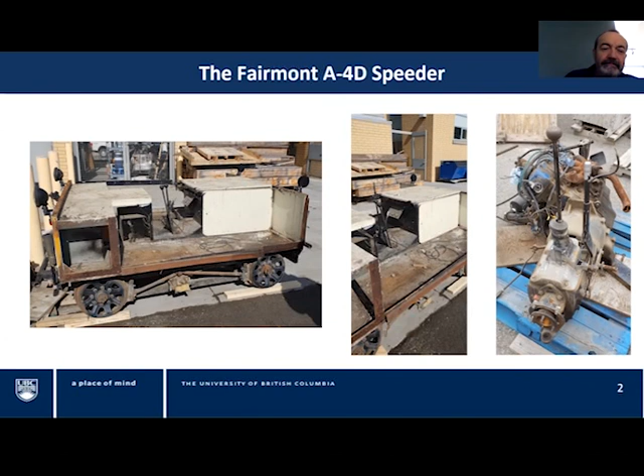It has a braking mechanism that is foot operated, completely mechanical, similar to a handbrake, which is applied equally to all the wheels using tread brakes. It had a manual transmission gearbox with a single reverse gear and 4 forward gears. When we received it, it was not in working order, although I'm told our lab technicians managed to get the engine to work. The idea is to convert it into a hydrogen-powered vehicle where we could demonstrate the Hydrail technology, and for the vehicle to be used as a test bed for future research.

The current powertrain is a series hybrid where we have a hydrogen fuel cell acting as a charger for our lithium iron phosphate battery bank. The batteries are tasked with meeting all the power dynamics, which is meant to improve performance and overall system efficiency. Power flow is unidirectional from the fuel cell to the battery bank, and bidirectional between the batteries and the motor, giving us regenerative braking ability.

By design, the entire system voltage doesn't exceed 60 volts, making it a low voltage design according to CSA for safety. Low voltage means high current, which is not recommended for production as it is more costly. However, it simplifies our design and avoids us the need for specialized high voltage equipment, training, and safety certifications.

So a little bit on what we plan to do with this vehicle. The retrofitted vehicle mass remains unchanged at 1,000 kilograms. We replaced the 60 horsepower engine with a 20 horsepower, or 16 kilowatt, electric motor.

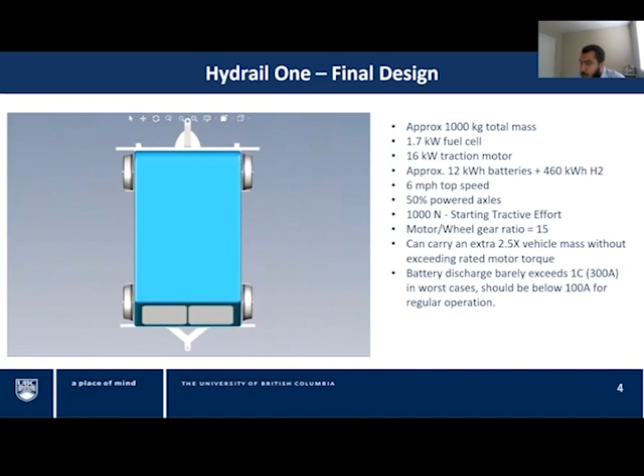The energy storage consists of 12 battery cells, each at 1 kilowatt hour, plus 2 ultra-high purity, high-pressure steel hydrogen tanks at 183 bar pressure, each carrying approximately 7 kilograms of hydrogen, for a total onboard hydrogen of 14 kilograms.

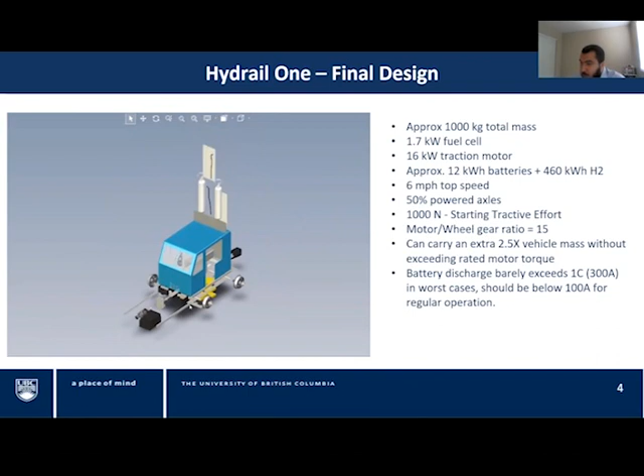At rated power, we should get 45 minutes of operation. However, we expect power demand on tangent level track and at speeds below 10 miles an hour to be a quarter of that of rated power, for example, 3 to 4 kilowatts. This gives us approximately 7 hours of continuous operation.

And if we assume a 40% fuel system efficiency, the stored hydrogen should require refilling once every 100 hours of operation. The drivetrain was designed to focus on torque production as opposed to high speed.

The vehicle should produce 1,000 newtons of starting tractive effort, meaning that for every kilogram of mass, the vehicle produces 1 newton of starting tractive effort. For comparison, a GP9 locomotive produces approximately 2.5 newtons per kilogram, and that is a locomotive meant to pull many heavy freight rail cars behind it.

Continuous tractive effort is achieved through a combination of a unique electric motor technology and speed reduction of a 15-to-1 ratio. So we are using speed reduction, or torque multiplication. We're really multiplying the torque.

Theoretically, the vehicle should be able to pull 2.5 times its mass without exceeding the rated torque for the motor. And even in the most extreme cases, the batteries don't exceed their 1C discharge rate, and should normally be at less than 0.3C most of the time.

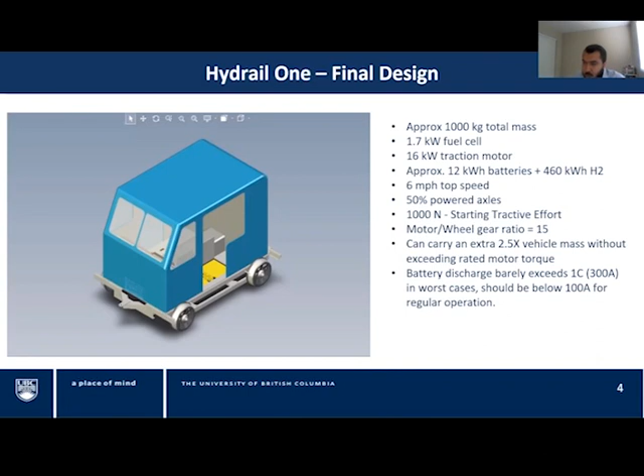So what have we done so far? Well, in March 2019, Caribou Rail delivered the speeder. Removal of the existing powertrain and other systems such as the heater, handbrake, wheels, and fuel tank was completed in May. By August 2019, we had disassembled the chassis.

Parallel with the disassembly effort, we were constantly taking measurements and updating our CAD drawing of the chassis. In September, we had a good estimate for the final vehicle mass, which we used to size the drivetrain components to ensure adequate torque production. We also spec'd the drivetrain parts such as the motor and speed reducer.

By October, our traction motor had been delivered, and our pneumatic tread brake system was designed and ready for building. We ended up ditching tread brakes for disc brakes, and our motor/speed reducer combination block was fabricated. The battery cells, as well as the battery management system, were delivered in January 2020 and were subsequently tested.

By February, we had received our Ballard fuel cell, which we have so far not tested, mainly due to regulations on in-lab hydrogen storage and then the pandemic. As of May 2020, the drivetrain and chassis are at 100%, having been assembled, tested, sandblasted, and painted.

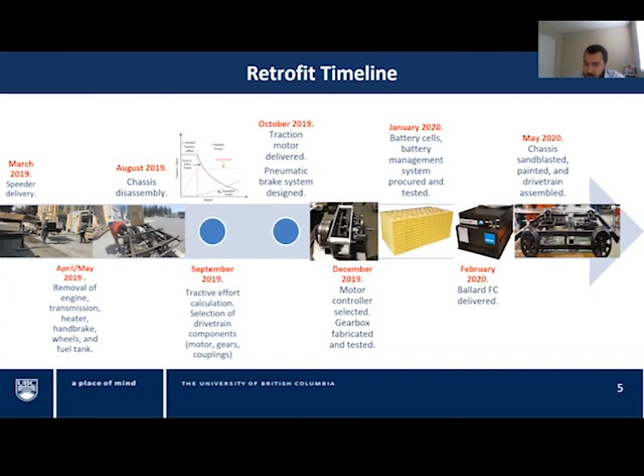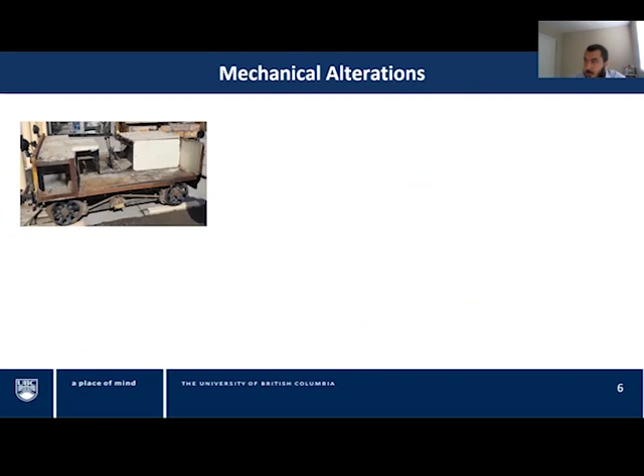So here's a slide showing the main mechanical alterations. This is the vehicle as we have received it. This is the vehicle after we removed the engine and the transmission block. We did some more removing — the entire vehicle body, the fuel tank, batteries, the heater, everything. And now we have the chassis.

We ended up removing some more just to clean it up and draw the parts. Then we assembled the drivetrain to the rear axle. And then at last we have the vehicle sandblasted with the drivetrain assembled and the entire chassis painted.

Here is a short video of progress as of June 2020. So this is from a week ago.

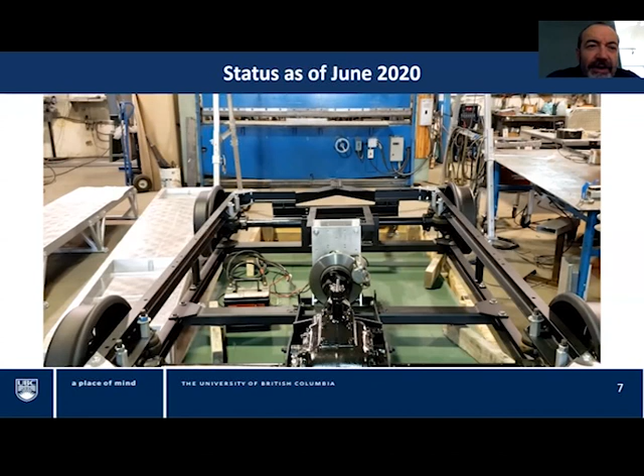Cassidy, are you on mute? Yeah, I'm here.

There we go. All right, key design factors. When deciding upon the layout for Hydrail 1, the following objectives were kept in mind: safety, ease of use and maintenance, and simplicity of our design.

Safety is obviously a priority, and therefore all design choices were made so that safety was not compromised in any way.

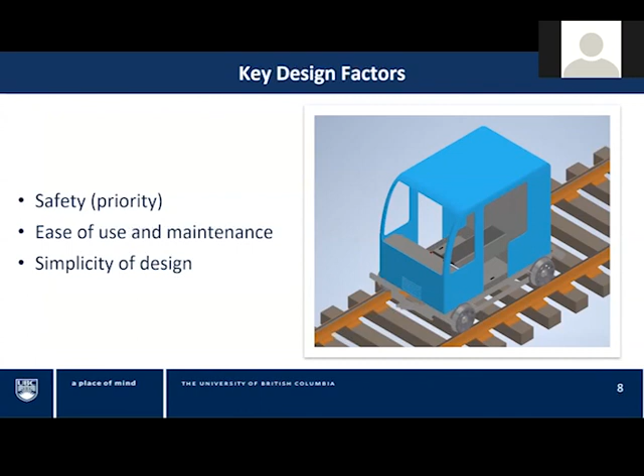The greatest danger in a vehicle that runs on hydrogen gas is obviously that the gas may combust, and so our vehicle will have exceptional ventilation to prevent the buildup of hydrogen gas in case of leaks.

This is why the gas lines, hydrogen cylinders, and fuel cell exhaust are all sealed off from the interior of the vehicle inside the gearbox cover, which is a T-shaped compartment that can't be seen in this picture, but will be seen in later pictures.

The large opening in the vehicle floor allows for airflow. Realistically, this will probably be covered by a grate vent to prevent large debris and animals from getting inside the vehicle.

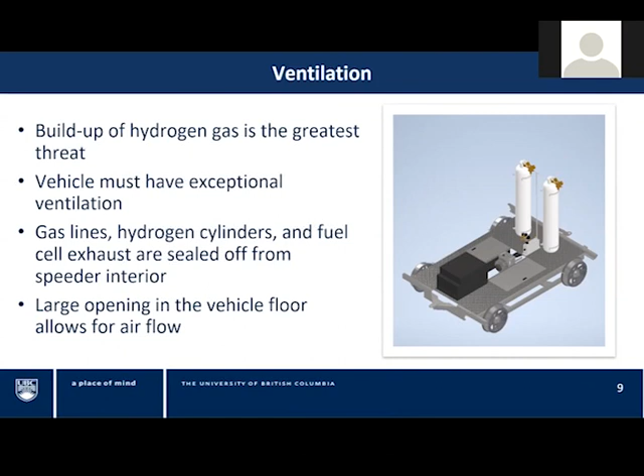The hydrogen fuel cell is the heart of Hydrail 1, providing, in addition to the battery banks, the power for operation of the entire vehicle. The fuel cell is air-cooled and therefore requires an air intake, and also produces exhaust that needs to be vented to the vehicle's exterior. For this reason, we have placed the fuel cell at the very front of the vehicle, where the internal combustion engine of a car, for example, would normally be placed.

The grill and air filter in front of the fuel cell's air intake will catch any debris, and the rear of the fuel cell is open to the exterior via the opening in the vehicle's floor. One possible improvement over the current setup would be to add a system that would catch the pure water exhaust while still allowing the air to be vented to the vehicle's exterior.

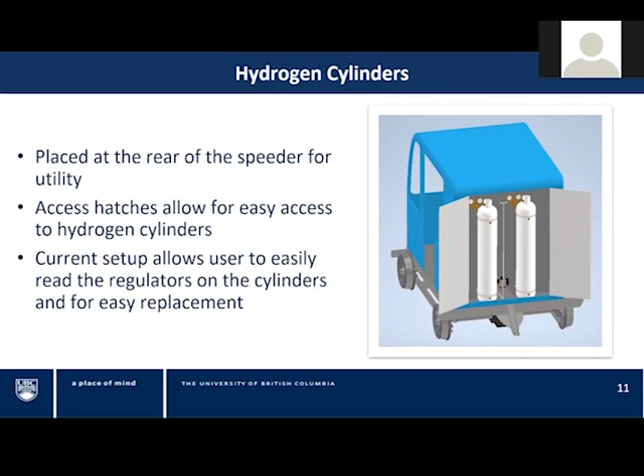The batteries that help power Hydrail 1 are all housed in two bays located beneath the vehicle floor and accessible through hatches, one on each side. The benefit of locating them here is that it takes advantage of unutilized space and lowers the vehicle's center of gravity. The power cables from the batteries will run under the floor and up into the center of the gearbox cover to the fuel cell and dashboard.

The data cables running from the fuel cell to the valve block will run through the gearbox cover, and the gas connections from the valve block will run up to the hydrogen cylinders. Next.

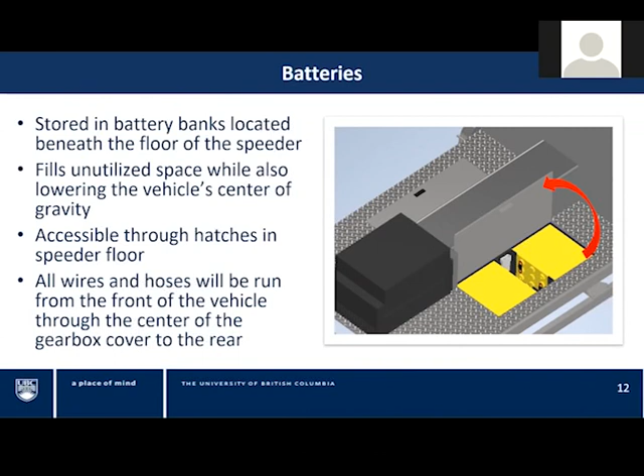All right, that's it. Thank you very much.

All right, thanks, guys. That's great. Can we leave questions to the end of the session, or does anybody have a burning question right now? All right, hearing none, I gave you a split second there. Grace Kwan, you're on. Grace, are you there? Unmute yourself if you are.

Hi, Gord. Thank you for inviting me to this very interesting program. I'm just going to share my screen now and go through our presentation.

Okay, so Hydrogen in Motion. Higazi showed a very interesting presentation about what you're doing using standard high pressure tanks. What we would like to use is our innovative solid state hydrogen storage. To give a summary of what's happening in the hydrogen landscape: our executive summary is that we've developed a safe, cost-efficient, and multi-purpose tank for storing hydrogen at very high density, equivalent to a high pressure tank at 700 bar, but with volumetric and cost advantages. Our tanks can be used in three major ways: to transport and distribute hydrogen, to improve hydrogen fuel cell refueling, and to store energy from wind and solar—and of course, every fuel cell application requires a tank. We believe our breakthrough technology is key to unlocking the hydrogen supply chain, and will play a major role in growing the global market, such as this Hydrail application for hydrogen technology.

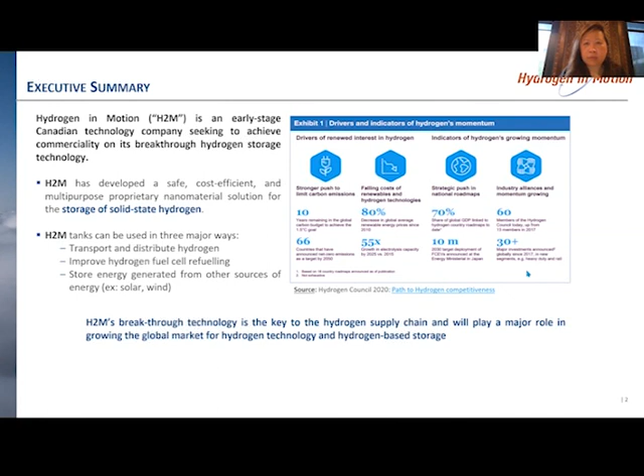I'm just going to stop sharing for a moment. Okay. This is technology at its best. You cannot have a meeting and not have a technical glitch. Gotta have a glitch, it has to have a glitch. So here we go again. Once we start sharing screen, my computer decides it doesn't want to work.

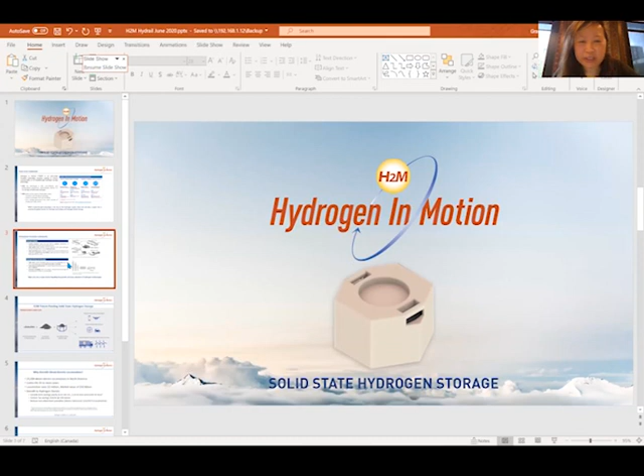So here it is. So why do you need solid state hydrogen storage? One of the big impediments to large scale adoption is cost, and a big part of that cost is in storage and transport. Hydrogen stations, as you know, are very limited in number, although Kelowna is scheduled to get one next year. They're very expensive, costing about $2 to $3 million each pump, and they have very high operating costs because of the compressors and chillers needed to get to 700 bar.

So the second issue is hydrogen storage and transport. These are very high cost as well, 30 times the cost of a conventional gas tank. If you can imagine a gas tank in your vehicle, they're $200 to build. Right now, a high pressure hydrogen tank is somewhere between $5,000 and $7,000, if not more, to build. The high pressure requirements also create a safety factor, and it puts economic feasibility in play.

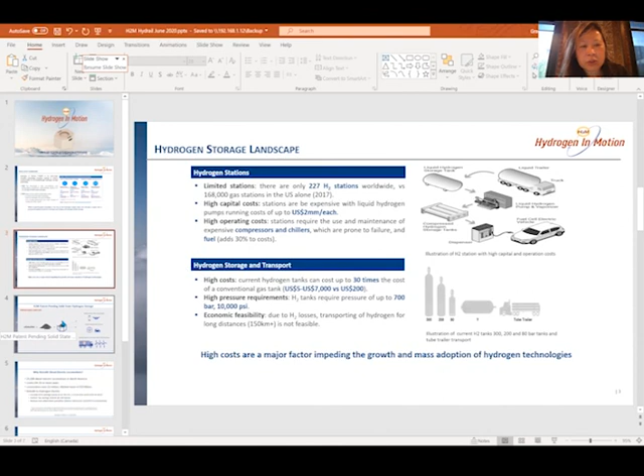So how does Hydrogen in Motion resolve this issue? What we've done is made a nanomaterial. The hydrogen is attracted to the surface of the nanomaterial using van der Waals force. We keep it at 50 bar. Because it's such low pressure, we can make it in multiple sizes, from drones to swappable tanks for vehicles to tanker size to store excess energy.

So why retrofit diesel electric locomotives? Gord, you didn't go into your presentation about what the advantages are, so I thought I would touch on it briefly. There's 25,000 diesel electric locomotives in North America, and I'm unashamedly cribbing off Gord's notes, so I have to recognize that. The useful life is 50 years or more, and a locomotive costs $2 million. So the market value for just the diesel electric locomotives alone is worth $50 billion.

To refit to Hydrail, we're looking at the economic drivers. In Canada alone, your GHG savings is 6.4 megatons of CO2. That represents a carbon tax saving of $192 million at $30 a ton. And then there's also a reduction of non-attainment penalties. I know Laszlo's on the line, so he would understand this.

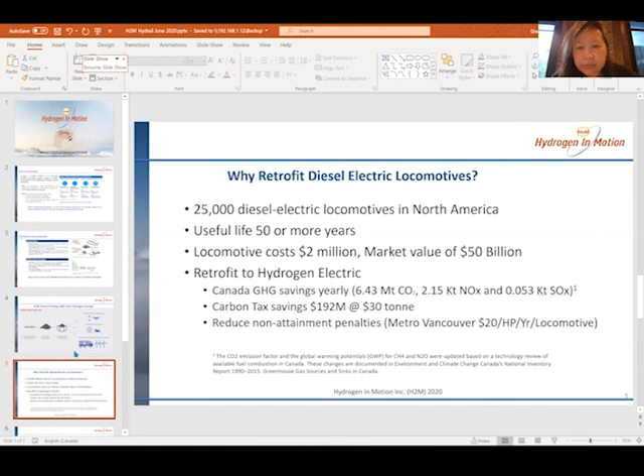We can put in more fuel, so operational time and duration is the issue. That's the advantage Hydrogen In Motion brings to the table, as well as lower operating costs, less energy required to refuel, store, and transport. So that's the advantage we bring to the table, as well as why we're working in Hydrail, because I think there's a real economic opportunity as well as an environmental opportunity.

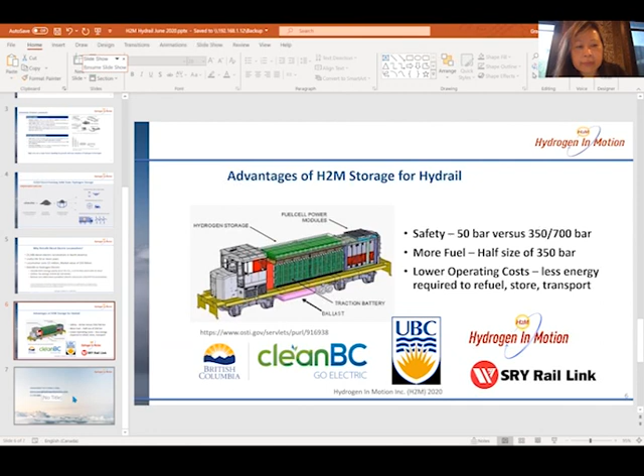Last slide is just my contact details, if anyone wants to get hold of me, ask questions if we run out of time on this interesting presentation. Thank you very much. Thank you very much, Grace.

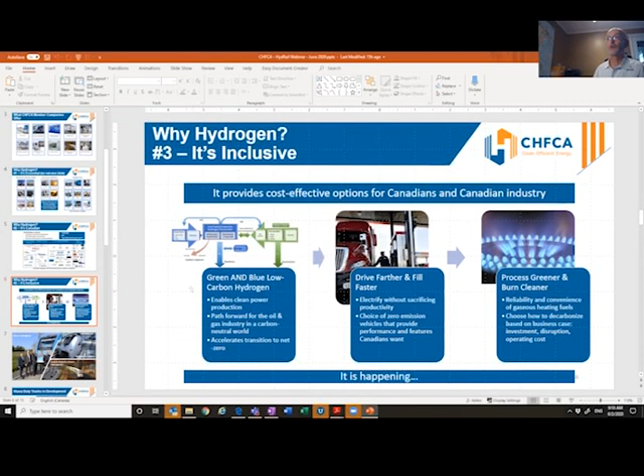So what's happening? Well, there are things certainly happening. As was mentioned earlier, Canadian companies are involved in hydrogen fuel cell projects around the world. Studies are ongoing, but it is certainly taking its time, and we want to find ways to move that forward. We have many companies involved in development of hydrogen fuel cell equipment, and we just announced here in Canada, Daimler and Volvo and Rolls-Royce are expanding the work they're doing here in Canada on fuel cell technology to move that into the heavy-duty space.

We have, of course, the transit buses that are the most advanced fuel cell applications and that are ready for commercialization today. Many OEMs offer fully backed and warranted fuel cell electric buses, and these are ready for deployment today, and we need to start looking at them because they offer a very good solution for transit agencies.

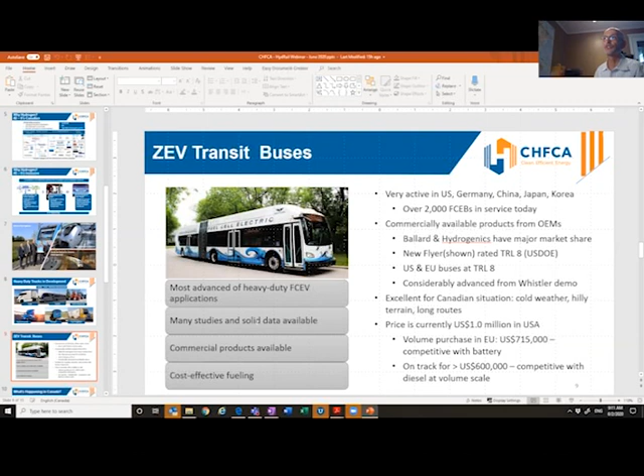So what are we seeing as a result of all this in Canada? Well, we have this technology leadership that's leading to investment, and we are seeing investment flowing into our Canadian companies now. We're seeing jobs and growth. But we always run into the question of, well, haven't we seen this before? There was a boom back in the early 2000s. What's different now? And it is different this time.

The improved cost and performance of the fuel cells and fuel cell products, the improved costs and broad availability of low carbon intensity hydrogen, and the cost for producing that is dropping. And also policies are being put in place globally that are pushing us to a carbon constrained economy that provide the business case that the hydrogen fuel cells need.

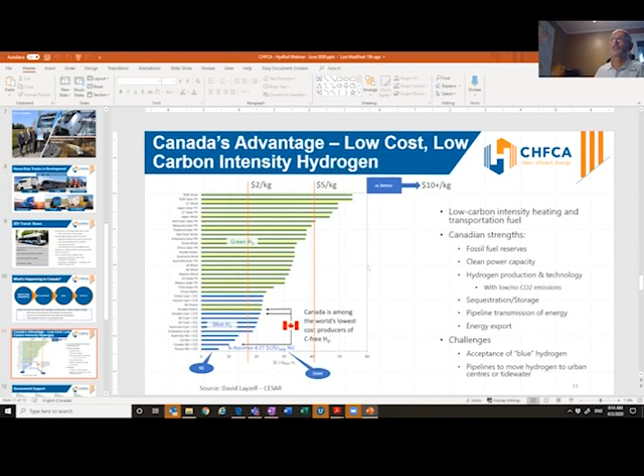We're also seeing government support, federal, British Columbia, Quebec, and Alberta level. I won't go into too much detail, but there's growing, as was mentioned earlier, roadmaps being put in place, plans being developed, and strengthening interest in what hydrogen can do.

So what do we need? Well, we've got a bit of a challenge here, and this is where we look to this group and others to start helping solve these problems. You've got a chicken and egg.

If you're going to ask a railway, a transit agency, a trucking company, or whoever it is to commit to hydrogen energy, they're going to need to understand it and know how it can help them. They need to see commercial fuel cell EV products, something they can buy backed by a warranty at a reasonable price. And they need cost-effective hydrogen supply that's going to be available and low carbon intensity.

On the other hand, you've got the people that can supply that, the OEMs and hydrogen suppliers. They need to see demand. So you've got this chicken and egg problem: until you get the demand, you can't get the products, and until you get the products, you can't get demand.

It is moving forward, obviously, but the concern is how do we move this faster. We've got concerns around loss of Canadian leadership, and concerns around laying groundwork for our post-2030 GHG targets. So we need to try and find ways to move this a little faster, and what we're proposing falls into what we need to stimulate this.

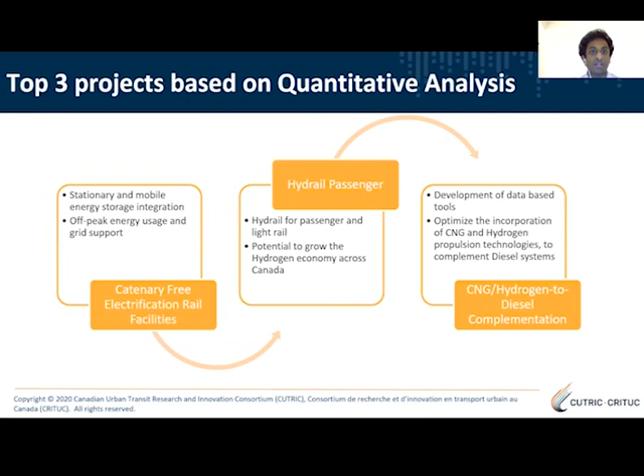Some of the conclusions we found from this initiative: in the short term, there is opportunity to electrify switch engines in train yards. Not an entire locomotive powertrain, but switch engines within train yards—there's a lot of opportunity to reduce local GHG emissions within the train yards themselves.

We also found there's an opportunity for Canada to leapfrog catenary electrification systems and move directly into advanced non-catenary electrification systems such as Hydrail and battery energy storage systems.

We found that Canadian rail industries have a strong desire to support domestic advanced rail technologies through demonstration, research, and development. We also found that hydrogen fuel cell-based electric rail technologies is one of the most beneficial ways to achieve emission goals and to grow the economy through demonstration, research, and development.

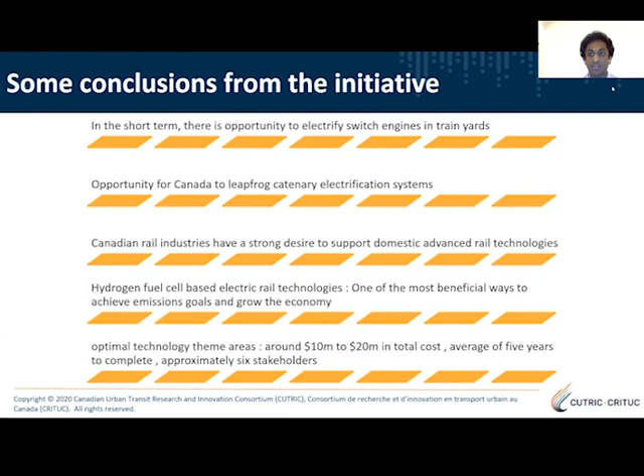And the optimal technology theme areas, based on interest, were around $10 million to $20 million in total cost, had an average of 5 years to complete, and approximately six stakeholders—beyond which the project achieved a level of complexity that made it difficult for stakeholders to really sink their teeth into it.

This report is available on our website as of earlier this week. It is available free for download. It will be available from Transport Canada's website as well later in the year as they work through some COVID protocols, but it is available on CUTRIC's website at the moment. If you want to download it, it's about a 100-page report. I summarized it really quickly as I was only provided about 10 minutes, but there's a lot of detail in there.

And the last project I do want to touch on—and I believe Gordon, you were on one of our presentations as well for the rail report, so we do appreciate your engagement with that—is the British Columbia Fleet Electrification Feasibility Analysis and Simulation-Based Planning.

Something we found is that we have an internally developed route simulation tool that, for transit agencies in the initial stages of planning their electrification rollout, will provide an assessment of their routes' capability to be electrified using today's currently existing technology, be it hydrogen fuel cell or battery electric. This lets transit agencies understand what it would take to electrify their fleets, what investments they would require in terms of chargers and fueling stations, and what routes would actually need to be modified before they can be electrified—it wouldn't be a 1:1 diesel replacement.

We found that these feasibility studies are a huge aha moment for transit agencies, and they don't deter them from electrifying—they actually drive forward electrification as agencies get a better understanding of what it really requires. So something we proposed to the British Columbia government is a provincial fleet electrification feasibility study.

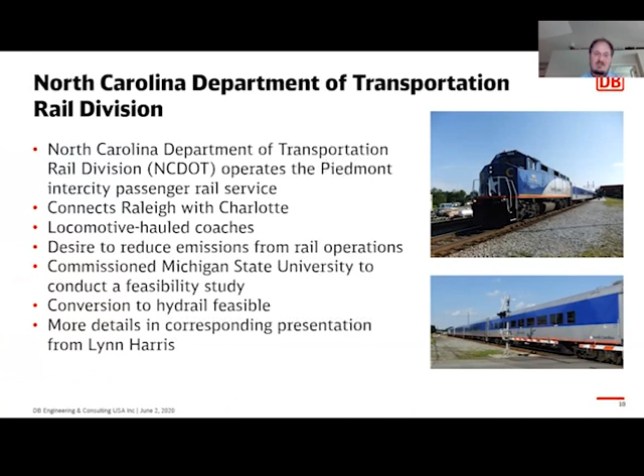North Carolina - we just completed a report at MSU for North Carolina looking into intercity passenger rail services. They are much higher power than anything Hydrail currently operating worldwide, or any of the previous Hydrail demonstration projects. And we could confirm that it's actually technically feasible to operate that with a Hydrail solution. The Piedmont service connects Raleigh with Charlotte. It's locomotive hauled, different to the multiple units that we currently see. Lynn will provide more information on that.

Last, we have Momo presenting from the California Department of Transportation, largely the rail division. They own several locomotives and rail vehicles and would like to decarbonize all of them. They provide equipment to operators. Pretty much everything right now is locomotive hauled coaches, diesel electric locomotives, and overall the state has very ambitious goals to reduce greenhouse gases as well as air quality impacting emissions. They have commissioned DB Engineering and Consulting to investigate these alternatives to diesel, and we're working collaboratively with others on that right now. Momo will actually provide you with more information on that.

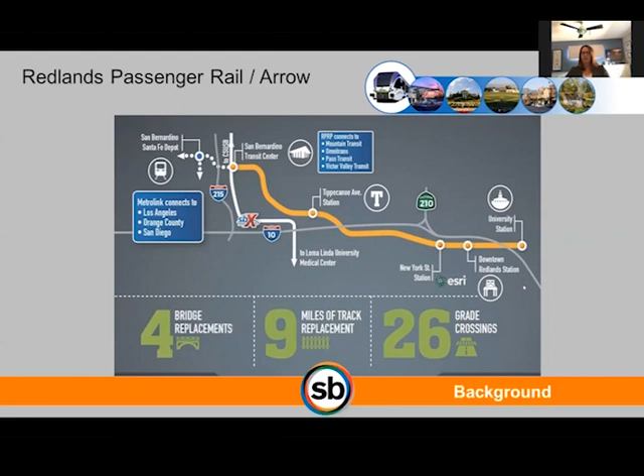We recognized there was an opportunity, and California is very forward-thinking and supportive of zero emission vehicle technology. So we started working with the state and developed a plan to secure grant funding to do the research and development, build the vehicle, test the vehicle, with the ultimate goal of incorporating it into what we call the Arrow fleet as one of the regular revenue service vehicles.

Our partners have been key. CalSTA and Momoko are very important to us. Not only did they provide our funding, but they're there for consultation all along the way, which is extremely important. The Federal Railroad Administration will be our regulatory agency and probably our largest risk area as far as time delays. I think they're good to work with, but this is new for them, and it's going to take a lot of coordination and good information to help them feel comfortable.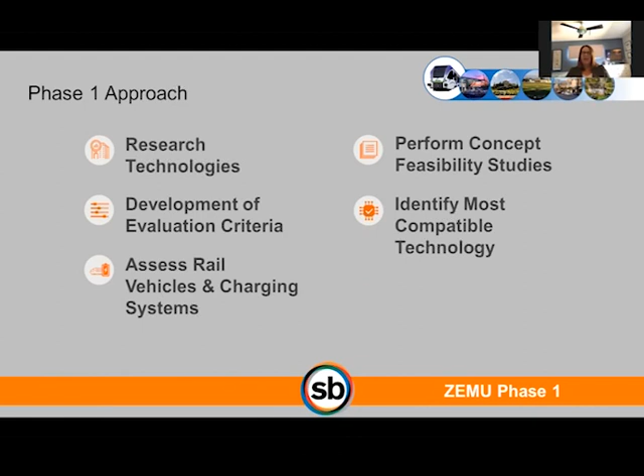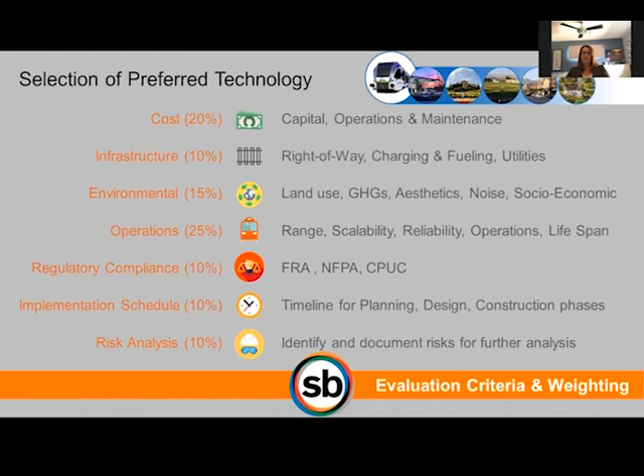We split this into phases. These are the key pieces of the first phase. We researched, developed evaluation criteria, and assessed the different systems. We did a very good concept feasibility study available on our website that I'd encourage you to look at, with the goal of identifying the most compatible technology. These were the criteria we used to weight the options to come to a final recommendation to our board. We also did early, high-level screening to narrow down how many propulsion options were studied in our feasibility report.

That's what you see up here. I'll say that SBCTA has a general aversion to overhead catenary, which I think helped us progress along. We do have a project to build half a mile of light rail in our county, estimated to cost almost $100 million, which is going to be hard for us to sustain if we don't find a different way to keep building out our transit network.

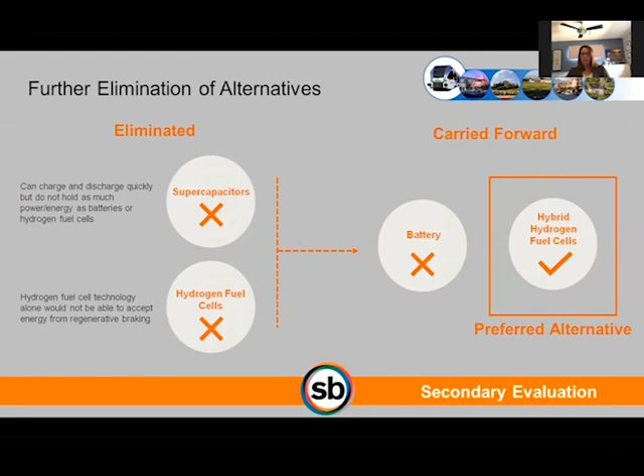We looked at supercapacitors, we looked at hydrogen fuel cells on their own, we looked at batteries, and then we looked at a hybrid of battery and hydrogen fuel cell, with the hybrid ultimately being our preferred alternative.

As part of our grant from the state, while we are going to operate a 2-car consist, they wanted to take the opportunity to demonstrate as much potential as there is for Hydrail. So a 2-car consist is what we're going to operate; that's one scenario we looked at. I think the most appropriate vehicle, if we're going to run to LA Union Station, is a 4-car consist, and so we're looking at that.

Because we are not building a 4-car consist, we had to look at a third scenario where we paired 2-car consists together, basically negating the weight of the Tier 4 diesel engines that wouldn't be in the ultimate 4-car consist that was hybrid, hydrogen and battery powered.

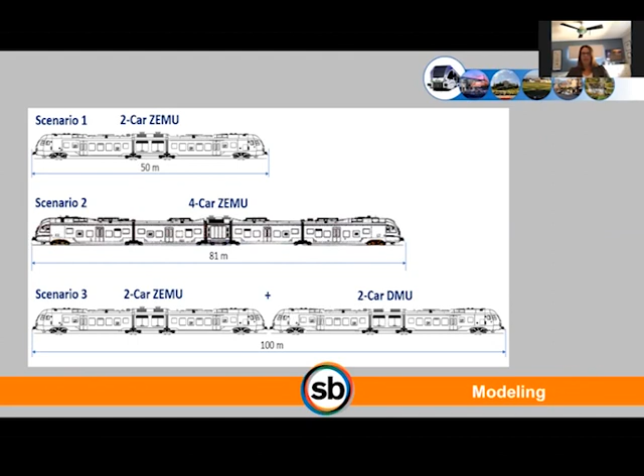We looked at vehicle characteristics for all of those - what they weigh, their mass, loading condition, auxiliary loads. We looked at the track characteristics. In the 9-mile corridor, the initial corridor, we have a 2% grade one way, so that takes a lot of power. We're in a very warm area, so air conditioning is extremely important. And then we just defined the key requirements.

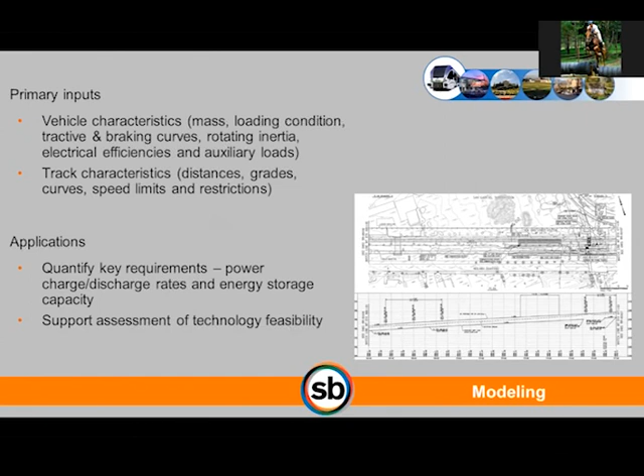So basically, this is the two-car consist. There was a model created where we put all this data and key information into create what our outputs would be. And that's what you see on the screen.

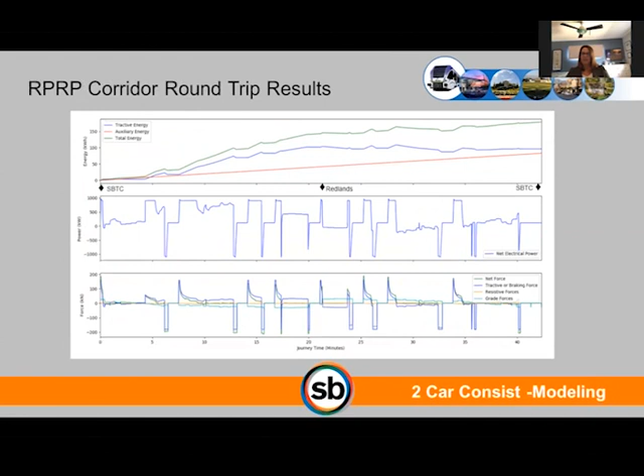These are the outputs from the two-car consist modeling. Well, these are the inputs, I should say: velocity, elevation, curves, and grade. Then here's our outputs. So you can kind of see it definitely performs one way going uphill, one way the other, of course. And then I just wanted to include this.

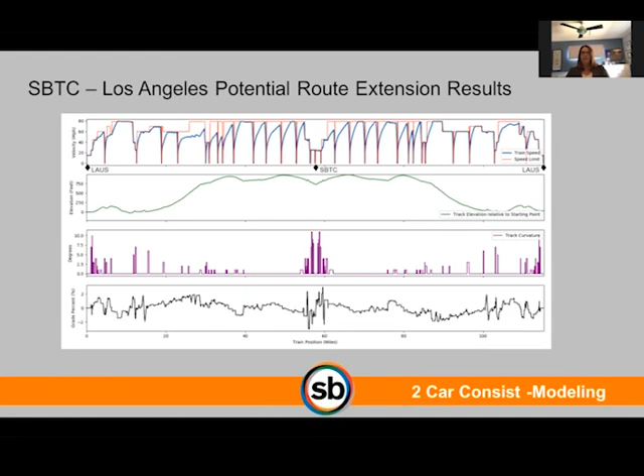So this is the way the model changes when you have to extend this to Los Angeles. So you can see very different. And you'll see that in the summary table as well, that the amount of power needed drastically changes, which makes sense. That was important in staff making a recommendation to our board on what we thought the preferred alternative should be.

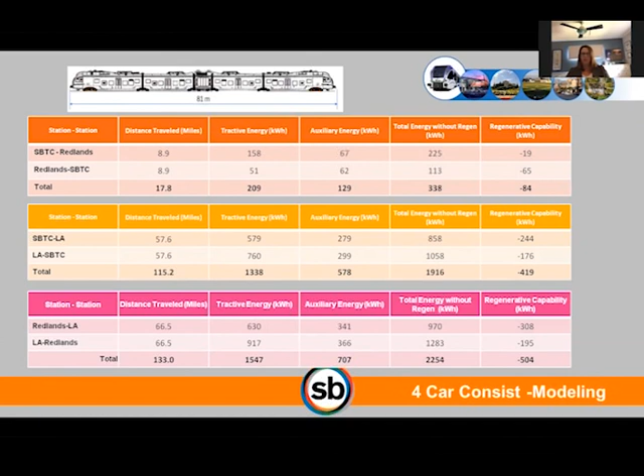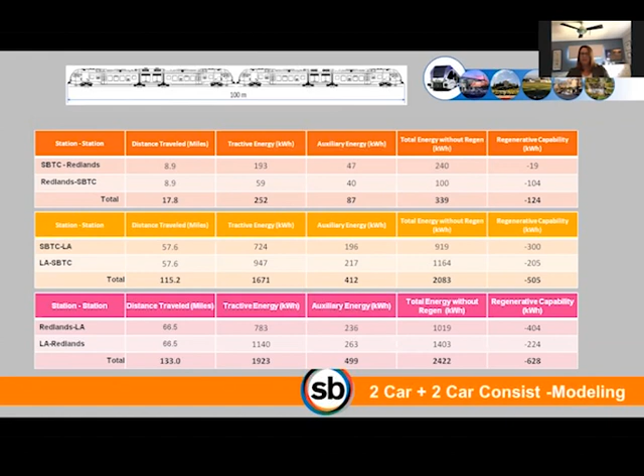Here's the 4-car consist. I believe these slides are available on our website as well if you have any questions on them, but you can see that it starts increasing, and we have a summary slide for that. And then here it is for the 2+2, which we need just for demonstration purposes when we get out there and actually start running the ZEMU. And then here's the summary slide providing what we needed with and without regenerative braking.

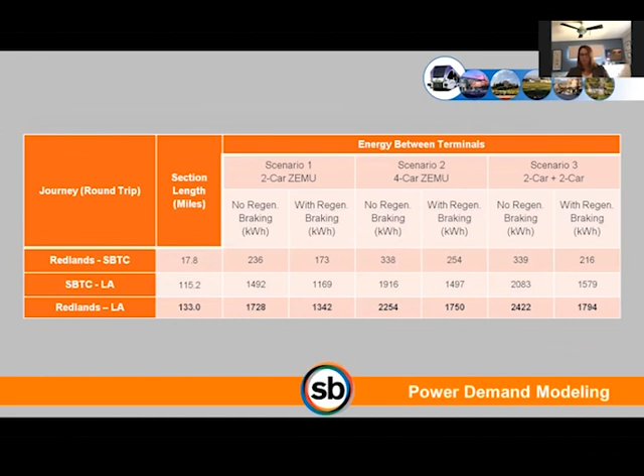So we looked at batteries, and then we looked at combining batteries and hydrogen fuel cells. I think you guys all know what batteries are, so I'm not going to spend any time on that. Again, one of the areas that we were most concerned about was charging methods for batteries.

Specifically in the city of Redlands area, it's a heavy historical district. There would have been a lot of adversity to installing overhead catenary. We're also extremely constrained as far as right-of-way width in that area, because we do have historic buildings on both sides of the right-of-way that we have to protect, in addition to the cost of building it as well as maintaining it over time.

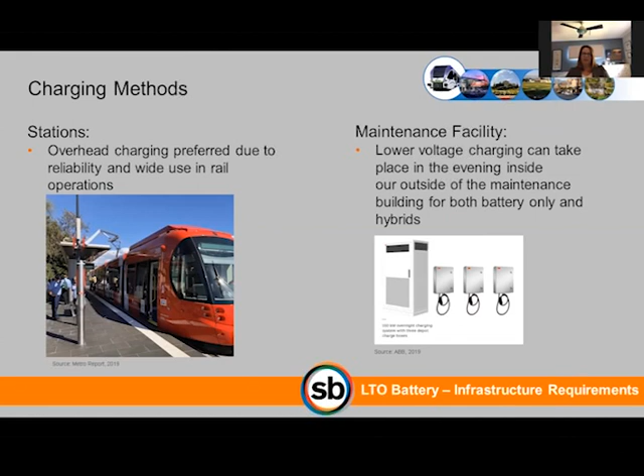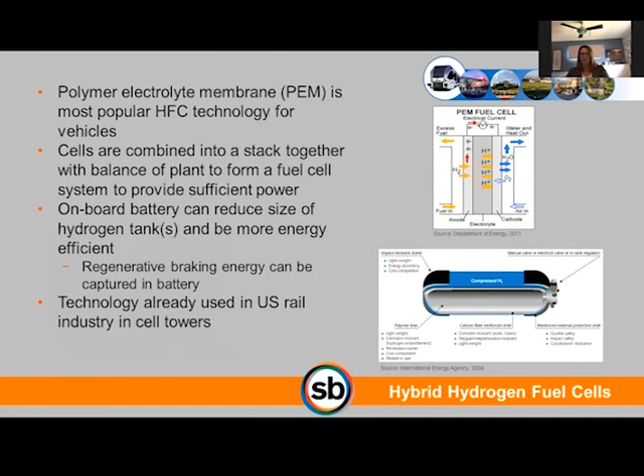I think I covered this, it really focused on, it didn't require wayside infrastructure to recharge. I think what we really found is that with the hydrogen fuel cell piece, it really did provide us the viability to extend to LA Union Station without having to build inline charging, and really gave us more flexibility, because that is our ultimate goal, is to allow this to be expandable.

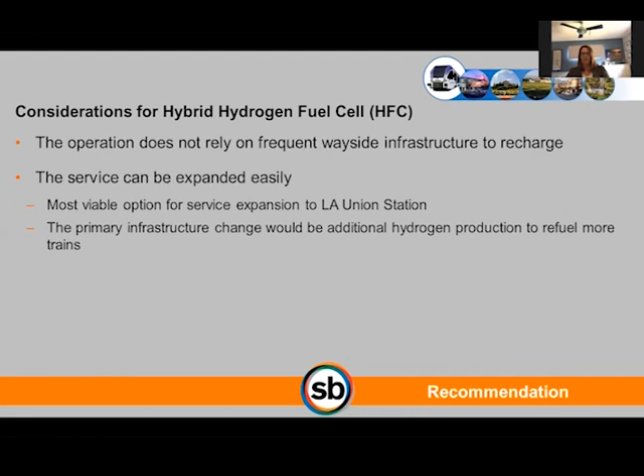We approached it wanting to keep as much of the DMU the same as we can, since ultimately Metrolink's going to have to maintain these, and we don't want a one-off vehicle. So we focused on what needs to change: the fuel tanks, additional volume or space needed compared to the diesel engine, leakage monitoring equipment, temperature control especially for the batteries, and proper ventilation.

I'd like to mention we are building a maintenance facility right now for the Arrow service, and that project was a little ahead of this opportunity to build a ZEMU. So we're working diligently to identify what needs to be modified in that facility, and it's not insurmountable. It's completely reasonable, and I think we'll be able to accomplish that.

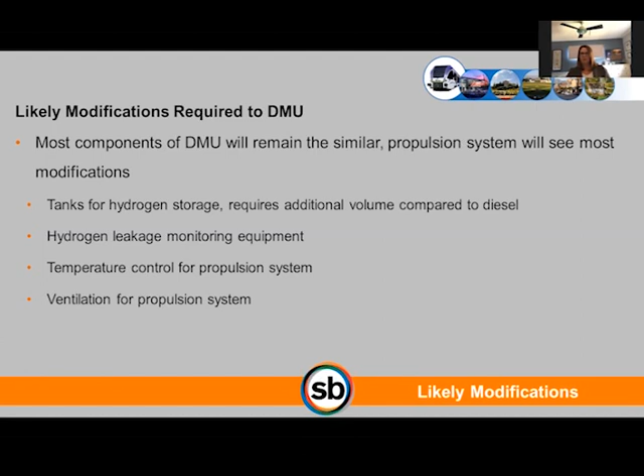Now that's different than the hydrogen fueling infrastructure. That will be at the facility, and we'll initially truck in with a mobile fueling unit. But I want to touch on a couple things. One is, as SBCTA, we do the regional planning for transportation. We just completed a zero emission bus study looking at our 5 county bus operators, and we're developing a plan for implementation. I see hydrogen as a key component of that.

We do get a little pushback, I'll be honest. It seems people are much more comfortable building charging stations everywhere, and there's still a misnomer out there that it's going to be more cost effective than hydrogen. So we work hard to make sure there's a balanced and reasonable analysis done based on actual costs, because when we did the feasibility study for this project, we found that the hydrogen powertrain came in very close to the battery powered train cost-wise and life cycle cost-wise.

It's something I repeatedly have to speak to, because there seems to be an automatic assumption that hydrogen is going to be more expensive. One of the key things for us too is we had to put a lot of cost into wayside energy storage if we were going to look at battery, because the grid is so unreliable. So if we want to continue to run transit vehicles, whether rail or bus, we had to have this incredibly robust wayside storage that is costly.

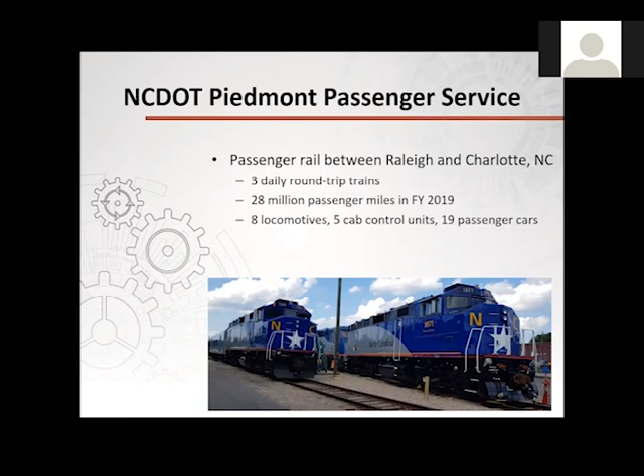So to dive right in, the NCDOT Piedmont passenger rail service is passenger rail between Raleigh and Charlotte, North Carolina. Currently have 3 daily round trip trains. We had 28 million passenger miles in fiscal year 2019. And our fleet currently consists of 8 locomotives, 5 cab control units, and I'll explain what those are on a subsequent slide, and 19 passenger cars.

There has been some substantial improvement recently. All the counties are currently classified as maintenance, but the Rail Division recognizes that we need to do our part to not let things get worse, especially in the future as we may add additional frequencies. We want to make sure we're not unduly contributing toward air pollution.

The corridor also encompasses 7 of the top 10 urban centers of North Carolina, and greater than half the population of the state overall lives within a 1-hour drive of the corridor. So this is a substantial impact on the citizens of North Carolina.

Just more about our operational overview. Again, NCDOT is the equipment owner and maintainer of the rail vehicles. We are operated by Amtrak. We're dispatched by NS and CSX. Our corridor is 173 miles in each direction with 9 total stops, including Raleigh and Charlotte. Our travel time is just over 3 hours each direction, so we're very, very comparable with car travel between the 2 cities.

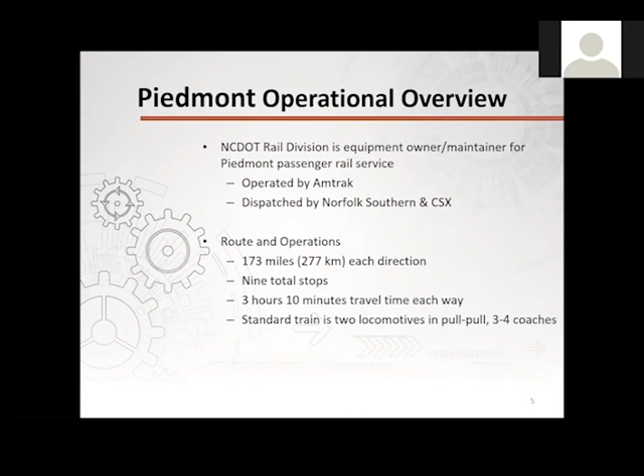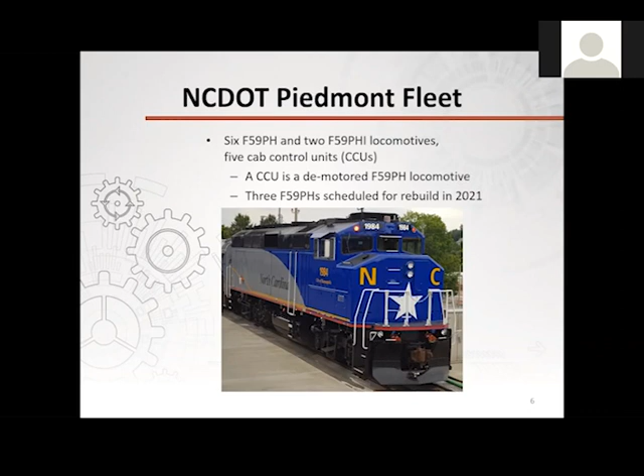Now, the actual motive specs for our fleet: our locomotives have 3,000 horsepower EMD 710 engines, that's about 2,200 kilowatts. And that's actually an interesting size to work with here, because that's about the same capacity that a standard freight switcher or even some short line freight locomotives use. So one thing we can take from that is whatever we're able to implement should be easily transferable to the freight industry in that regard.

Our head-end power engines are, on our newer locomotives, Caterpillar C18s, on our older legacy locomotives, Caterpillar C15s. Our older locomotives, which were all rebuilt between 2010 and 2013, our prime movers are currently EPA Tier 0 plus. The Caterpillars are Tier 2, and then our newer locomotives, which is 2 of our overall fleet, again prime movers EPA Tier 0, HEP engines are EPA Tier 3. So we've got a ways to go before we are all the way to where we need to be, at Tier 4 or better.

Our efforts to date include biodiesel fuel testing, retrofit emissions technology implementation, and then what we're all here for, Hydrail research, which we hope to implement within the next several years.

Just touch very briefly on the testing we've done to date. In the interest of time, I'm not going to go into tremendous detail here, but the Rail Division has worked with the NC State Environmental Engineering Department since about 2009 to test various blends of biodiesel fuel.

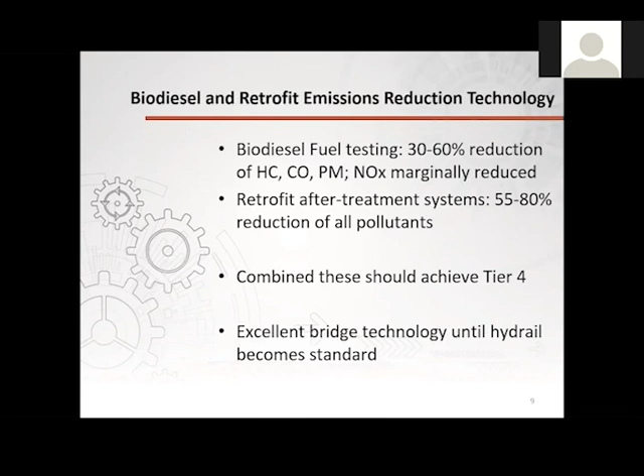Let's talk a little bit about the Piedmont's setup and how it's actually very conducive to Hydrail implementation. As I mentioned, we currently operate in a 2 locomotive configuration, pull-pull. We're planning to transition, hopefully starting next year, to replace one of the locomotives with a cab control unit. Obviously, you only need 1 engine for propulsion while the train is in operation, so we would then be in a push-pull configuration. As I noted on a previous slide, the CCU is simply a locomotive body with the engine removed.

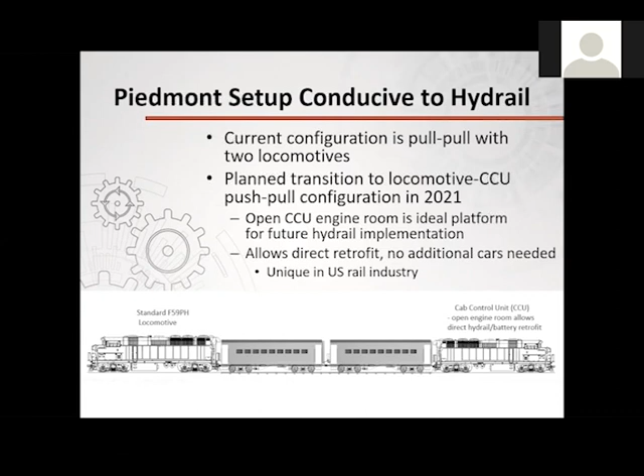That open engine room is the absolutely ideal platform for Hydrail equipment and system implementation. This actually puts North Carolina in a uniquely good situation, in that we could just drop Hydrail equipment into our existing locomotives. We don't need to add additional cars. We don't need to go out and procure new cars in order to get the technology implemented. That's actually pretty unique in the U.S. rail industry, to have this kind of setup that perfectly feeds into what would be desirable to do from an emissions standpoint.

We do have the option of phased implementation. We envision something along the lines of first implementing batteries into the CCU, to where you have a diesel locomotive, hopefully a Tier 4 diesel locomotive using the technologies we've pursued so far, and then a battery-powered CCU augmenting that on the other end. Subsequent to battery implementation, we could also add hydrogen tanks and fuel cells, to where you then have a full-blown diesel Hydrail hybrid train.

Later down the road, when our locomotives go up for their next rebuild, which would probably be within the next 8 to 10 years, we imagine that Hydrail will be established technology enough by that point that we could just pull the diesel prime movers and implement Hydrail engines, to where we would have fully operational Hydrail trains. Following that, we think we'd be at a position where we could be a model for national propagation of this type of system across other comparable intercity passenger rail agencies, and hopefully, as I alluded to earlier, even short line freight.

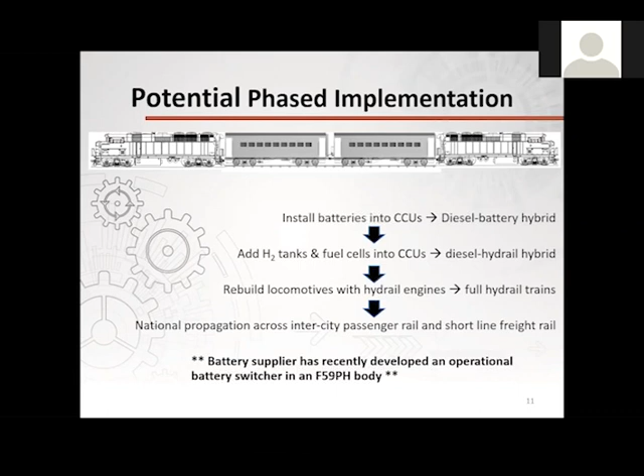That last bullet there at the bottom is actually pretty important. Our primary battery supplier has recently developed an operational battery switcher for an F59PH locomotive body, which really means that we've crossed all the technological hurdles needed for this first step of implementing batteries into CCUs. That would really just be an application exercise at this point, so we're making good progress on actually bringing this to reality.

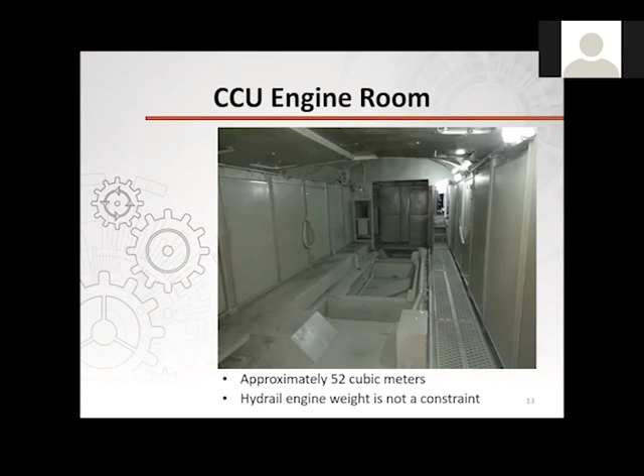So the status of our Hydrail research: in 2018, NCDOT contracted with Andreas and his team at Michigan State to perform a feasibility study on NCDOT's Piedmont trains.

As Andreas mentioned earlier, if we were to implement Hydrail in the future, we would be the largest rail fleet to do so. The feasibility study was actually just completed last week, and we are in the process of reviewing it, but it confirmed that a Hydrail propulsion system is feasible for NCDOT, specifically a 2-locomotive downsized fuel cell hybrid with a plug-in.

What that long name simply means is that we could divide the Hydrail propulsion components between the locomotive and the CCU. As I mentioned, our existing diesel engines are about 3,000 horsepower, and we could put around 1,500 horsepower, or maybe a little more, in both the locomotive and CCU to create an equivalent propulsion powertrain to what we currently have.

We see best results if we recharge our batteries after each round trip between Raleigh and Charlotte. We have a captive fleet, and all of our locomotives return to Raleigh every night, so that falls right in line with standard protocol for NCDOT. We would certainly be able to readily embrace charging our batteries on a daily basis.

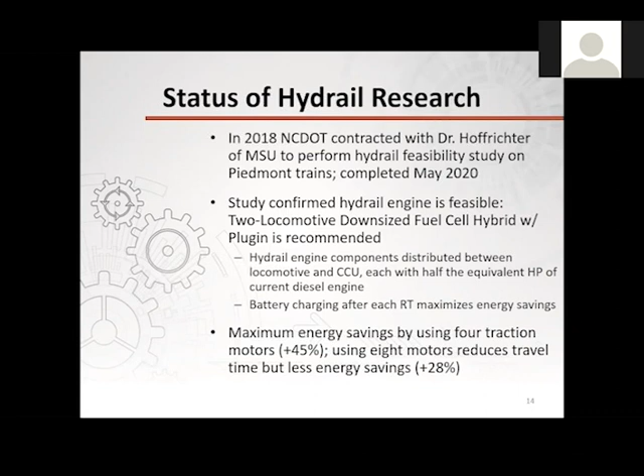So that would be a decision NCDOT is going to have to make, and that falls into exactly what our next steps are — an economic analysis to determine the preferred route, whether Rail Division management wants to see a trip time savings. I forgot to mention, implementing 8 traction motors actually cuts about 10 minutes off your trip time, which is not insignificant.

NCDOT has really made a big push over the past 10 years or so to try to save time wherever possible. So trying to figure out what's best from an energy savings versus trip time savings standpoint will be something that requires further attention.

We are at the point now, based on the results of the study, where we can pursue building a prototype or demo unit. Some of the major factors there will be to secure the funding to figure out how to do so, identify our supply chain, identify what tests are going to be required. We'll definitely be utilizing the H2 at Rail program that has been mentioned several times already.

And the Hydrail report is going to be made available to the public for anyone who wants to see it, after we get it finalized and blessed by everyone within NCDOT. I'll talk a little bit briefly about Hydrail infrastructure — this has been touched on several times already, but we'll talk about specifically for North Carolina.

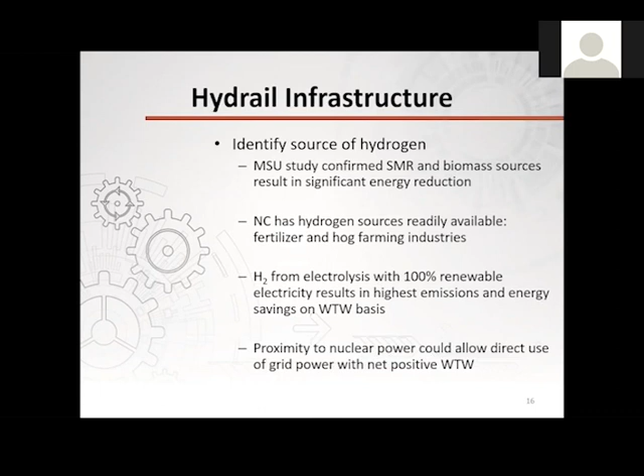We also have options such as hydrogen from electrolysis with 100% renewable electricity, which actually results in some of the highest emissions and energy savings on a well-to-wheel basis. North Carolina is also uniquely positioned to where we have a lot of extra surplus electricity from nuclear power, so we could utilize that as well and take grid power without increasing fossil fuel dependency — again, a net positive well-to-wheel.

Another big thing to consider, of course, when talking about Hydrail infrastructure is transportation. We would initially be looking at delivery from off-site via trucks when we only have 1 or 2 Hydrail-equipped locomotives, but we would also look into building a hydrogen plant as we expand our fleet in this regard.

We're also very well situated for where we'd be able to possibly one day build a larger multi-user hydrogen plant. The rail yard in Raleigh is located in close proximity to other industries like waste industries, the Raleigh bus terminal, and other potential long-term users of hydrogen.

One of the things the study found is that we see a net positive and almost indifferent well-to-wheel energy and emissions reduction with both delivery and on-site production. So we think we're set up very well in that regard.

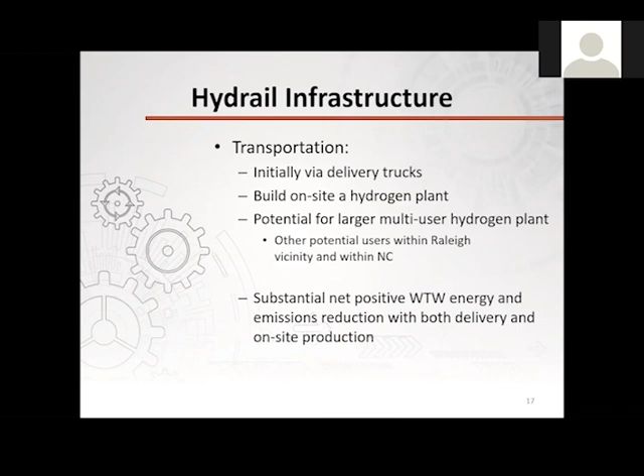Just a few quick slides and then I'll wrap up.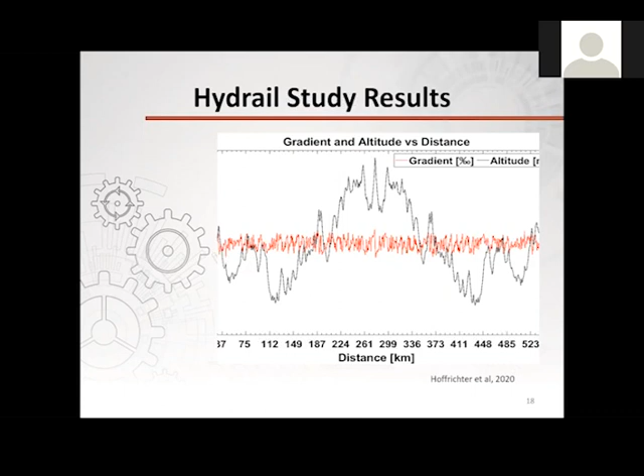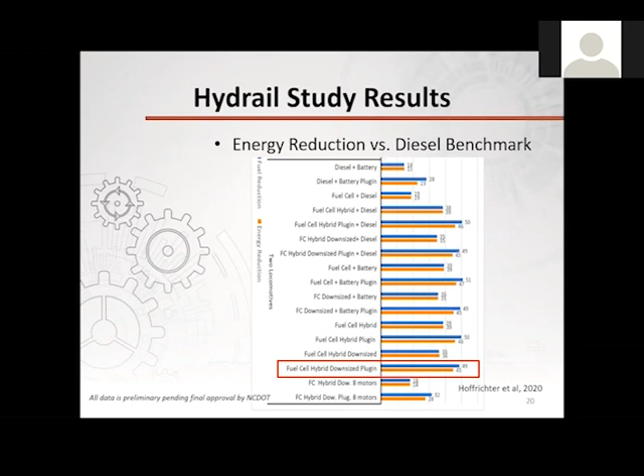This is a quick snapshot of all the 2-locomotive options Andreas's team covered for us, with net energy savings ranging anywhere from good to great. The fuel cell hybrid downsized plug-in option shows about a 49% fuel reduction and a 45% energy reduction, and that's going to be our plan A going forward.

With that, I will wrap it up and hand it back to Andreas, and thank you all very much.

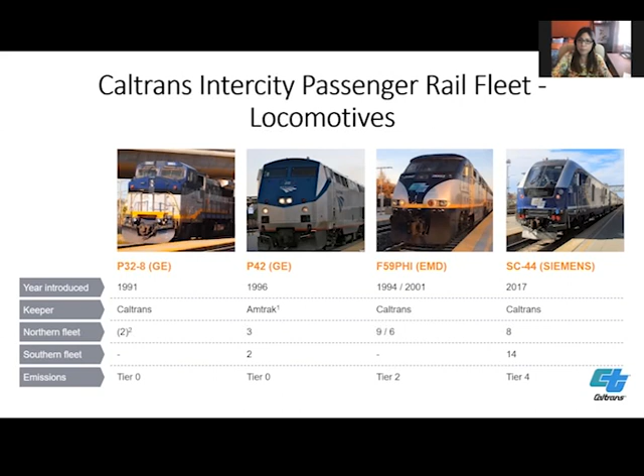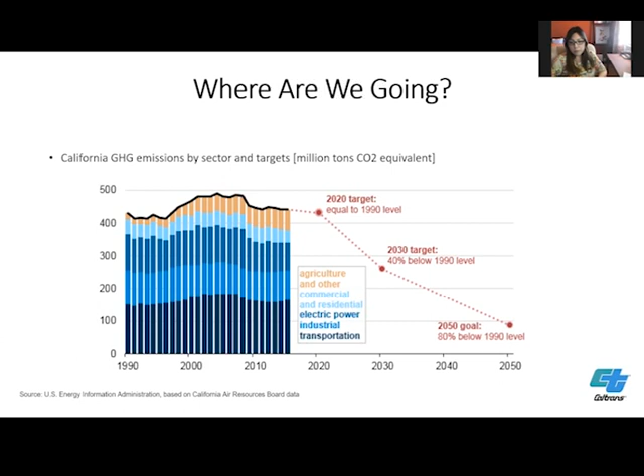We can clearly see every day that climate change is already affecting California — extreme heat, more frequent and intense wildfires. We used to get wildfires only in summertime, but now we see them in October, November, even December. We see poor air quality in many areas, drought, and related public health concerns — you name it, we have it in California. We clearly see what will happen if we don't do anything about it, so we're working towards meeting these aggressive goals. Next slide.

So how are we going to get there? As shown on the previous slide, California has set itself very ambitious emission reduction goals for both GHG emissions and other air quality pollutants. By 2050, an 80% reduction in GHG emissions across all industries has to be achieved — that's what we've set for ourselves. The transportation sector accounts for about 40% of all GHG emissions, so I believe that in the transportation sector, specifically passenger rail, which is what we have control over, we can reach an 80% reduction even before 2040.

But of course, in order for us to get there, this will require many changes to occur. There's still a lot of improvement potential related to reducing energy needed per passenger mile and the amount of emissions, for example, energy efficient driving by locomotive engineers and better planning to achieve higher railcar utilization rates. But to really achieve near zero emission or carbon neutrality, there's really no way around transitioning to new and innovative technological solutions that allow us to substitute fossil fuels. In our case, it's mostly diesel, by renewables.

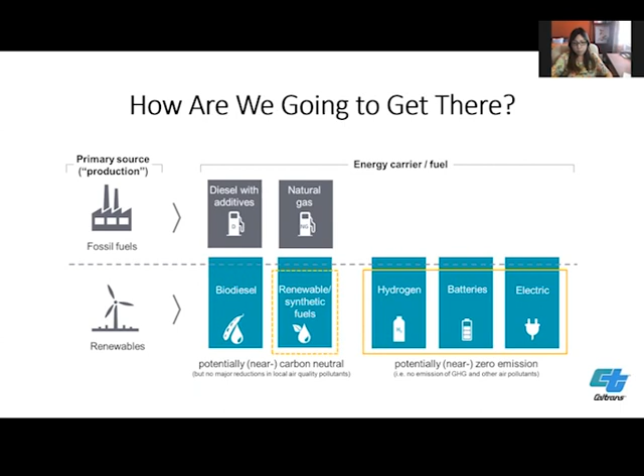So what are we doing about it? I was going to brag about SBCTA's ZEMU project, but since Kerry has already presented this, I'll just say that we are a funding partner, as Kerry mentioned, and also a stakeholder in this very exciting project. I really appreciate Kerry for always keeping me in the loop of the project status and key activities taking place. For details regarding this project, please look at Kerry's presentation from earlier.

Next slide. The other thing we are working on is, this is pretty exciting, a joint project concept development between Caltrans, California Energy Commission, Governor's Office of Business and Economic Development, and California Air Resources Board. We've been meeting regularly since last March to share information and opportunities, but we are really ready now to take our relationship to the next level.

The first thing we're trying to do right now is look at each agency's goals and targets regarding emission reduction, and we're trying to align them to really meet the state goals. It sounds really easy to do, but it's actually really difficult because we are taking the holistic approach. I think it was Jonathan who mentioned this earlier, but in order for us to be successful in transitioning to this zero emission technology, we really have to take the holistic approach, or we will not be able to succeed.

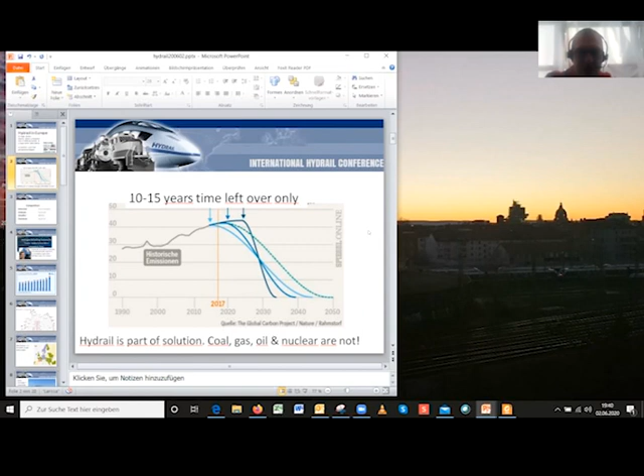So, I've got here my slide for Saskia, who I met last year in Bremervörde. She wants the prize, the innovation prize, for her hydrogen refueling station, which will be much more professional. Last year there were still 2 rail cars in operation in Bremerförde, a small town I'll show in a moment. That will be extended by the end of next year to 14 rail cars, and you can imagine you need a really professional filling station for that. That's the one she designs, and she wins a prize for that.

Sooner or later, just a moment, I have to swap the presentation. So that's a presentation from Alstom. Can you see that actually? Okay, let's do it this way.

That showed the timeline of the iLint being in good operation. Since 2016, they have had 2 rail cars in operation, first in test operation, now really in scheduled operation on that track, which I can show you here. This is Germany showing up here, about 1,000 kilometers. This is the state of Lower Saxony, just close to Hamburg, around Buxtehude, and this is the track where the trains are in operation. So passengers are already using hydrogen railway systems.

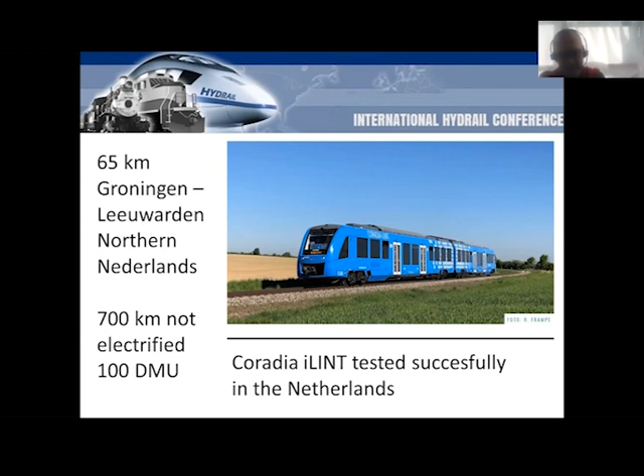There's another story about Alstom, who also confirmed going to the UK in order to bring hydrogen trains over there. Of course, they have the same problem, and coal power for power plants in the UK is fading out too, so they're bringing in more and more renewable energies, which is also quite good for the Hydrail system.

We heard about the Zillertal project last year in Austria. They've announced having 5 railcars, and they want 3 more. The funny thing about that one is they have narrow gauge. The first test is announced for this year, so be curious about this one.

And the regular service is just like in Frankfurt, by the end of '22.

Funny enough, we have a state around Berlin called Brandenburg that signed a treaty to develop a new Hydrail railcar, much smaller than the one from Alstom, because this is a very rural area, and the Alstom railcar has about 150 seats or so, which is far too big for most of that line. So they're developing a new one.

So there's a competition coming up between companies. We also have the Railway Competence Center in Austria, who's developing - just to mention - a shunter locomotive on a Hydrail basis. We'll see how this is going, but this is just for completeness.

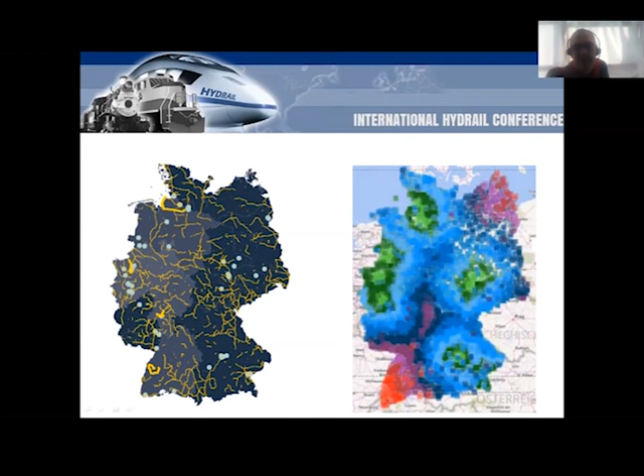Siemens, and that's the most important point, did an evaluation of which kind of Mireo rail car should be used for which kind of service—about the weight class of the rails, so standard or lightweight, and the speed, almost everywhere 160, though this train can even go 200 kilometers per hour.

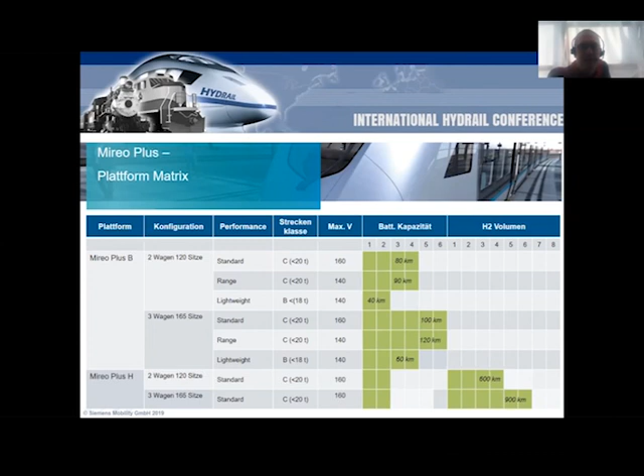But if you have a lot of surplus power, and you can shift the production of hydrogen, so the usage of electricity by time, then hydrogen pops in and will have good chances to be used.

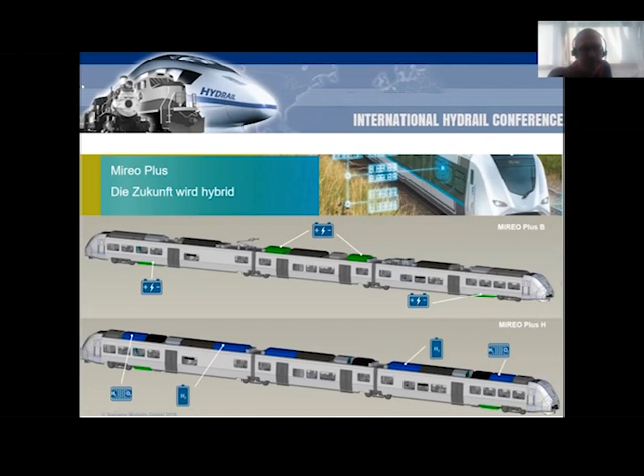At the end of the day, Siemens points out that the future will be hybrid—always going double tracked, which is quite a good strategy in train operation. So you have the battery electric multiple unit and the hydrogen electric multiple unit. The interesting thing is they plan to have even the Hydrail train with the catenary system, enabling them to be flexible—using the direct power of the catenary system, and using hydrogen where you don't have that infrastructure.

This is what you have already seen on that screen. I'm glad about your attention, and I just made it in time, 8 o'clock—it was a bit quick, but I hope you got the point. We have to hurry up. Climate change is coming faster than we want it to, and everybody still believes we have time until 2050, but actually we don't.

The second point is Hydrail is a good solution, part of the solution. And competition is coming up, and that's most important—it's no longer just like in the old East, when you have just one manufacturer and one certain specification for how to use it. Competition between different companies and services is always a driver to force progress. I think that's a good point to end on.